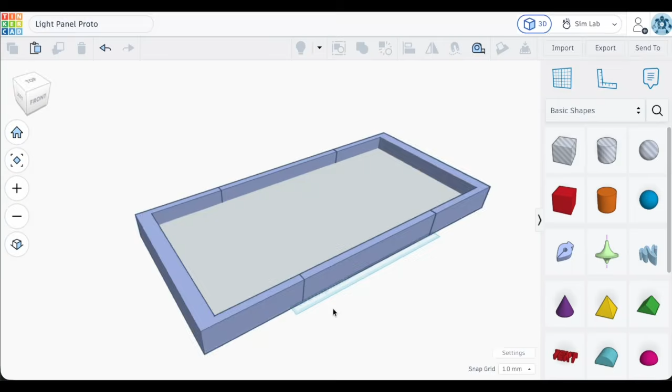So I am thinking ahead to a future project that exceeds the current dimensions of my print bed. So I'm going to need to do some assembly here. The thing is, one of the pieces that needs to be assembled is a flat panel. So I'm looking at printing this up in at least two pieces, but how will I join them together?

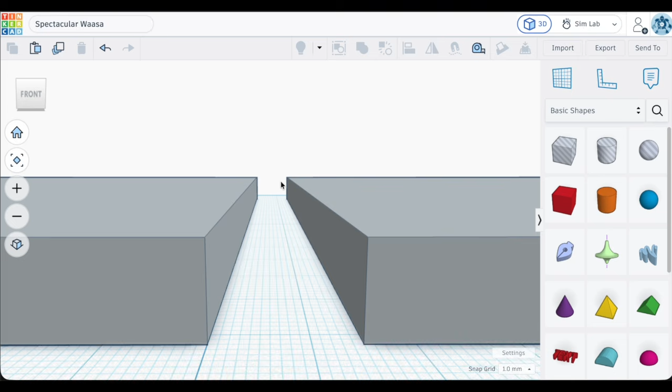So I have some options here, and that's what I want to investigate in this video. I want to figure out what is the best option to create a nice strong joint between these flat pieces of my panel. Now, slicers like Bambu Studio and Orca Slicer can add in these pegs or dowels right before

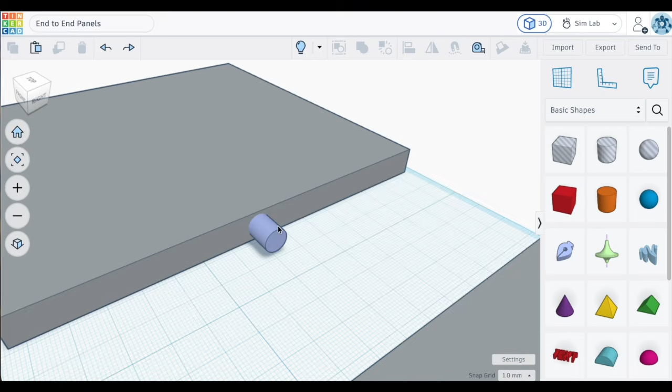you slice your project. But for me, when it comes to projects that will have several pieces to potentially assemble together, I like to take on the design of the pegs so I know how everything will fit together and hopefully catch any issues with peg or dowel placements. All right, we're going to try out some ways of joining these two pieces together.

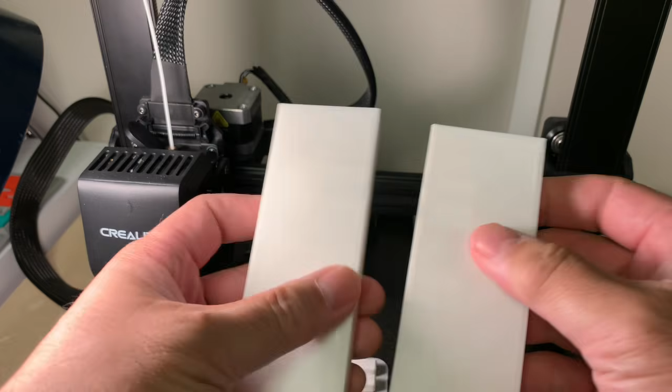So the first set of options involve the use of pegs that will fit into cutouts or holes along the side of the panels. Now, this is a fairly common way I've seen on YouTube because they help to align these different pieces up and provide additional surface area if you want to apply glue.

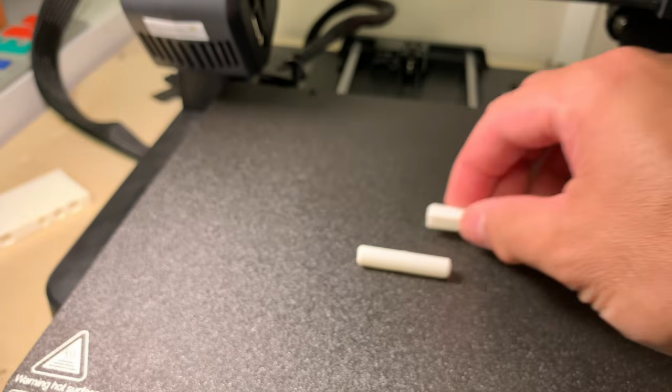Now, there are many different shapes and types of pegs that you can use. You have the cylinder-shaped peg, box-shaped pegs, and even flattened rectangular pieces, and I've seen them called splines. These can all serve as pegs.

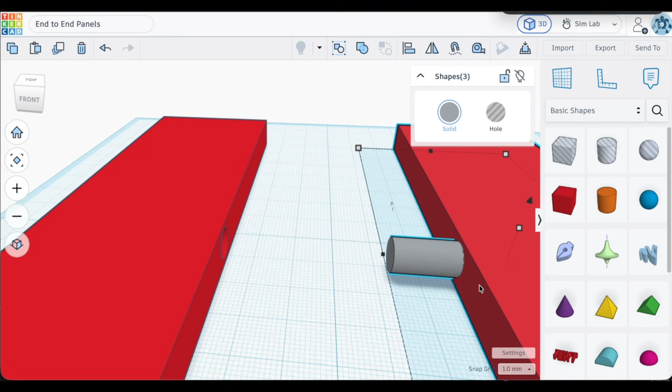Now, there are some different ways that you can implement these pegs and holes if you're trying to bring together two pieces. One piece can have the hole on one side, and the other piece can have the peg, and they will fit together. But you're going to notice that for me, I opt to print the pegs separately as separate pieces and then have the cutout for those pegs on both pieces.

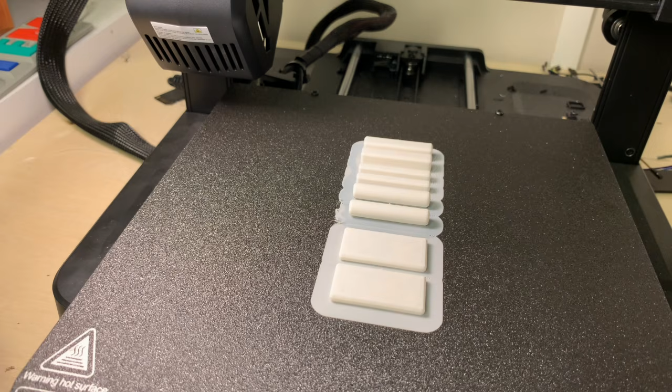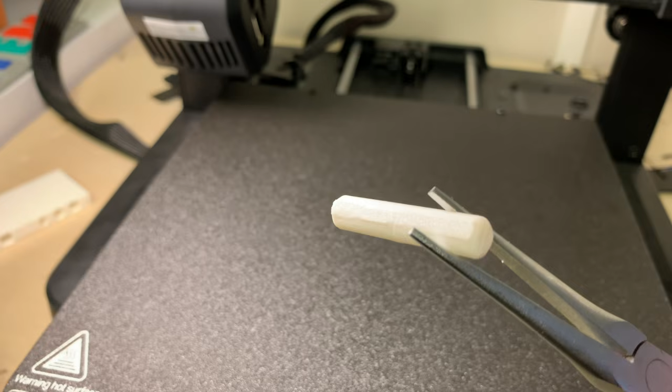I prefer to do this because it allows me to print these pegs without any need for support, as they will most likely be suspended off of the bed plate if they were attached to one of the pieces. Now, printing up a cylinder on its side does have some challenges because it does end up with a flattened side. So that is another issue that I have with using pegs that are a cylinder shape. And that's the reason why I often lean towards the rectangular or box-shaped pegs.

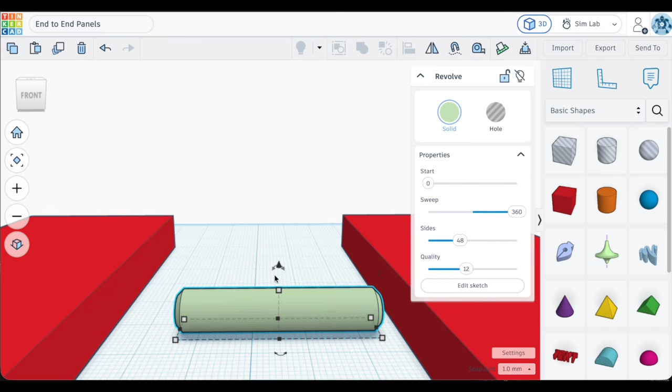Now, this brings up another important thing to consider, and it's the orientation of these objects when you print them up. For example, you could print up the cylindrical pin vertically and avoid having that flattened side that would normally rest up against the print bed. But the issue here is that the layer lines are now running across the pin rather than along the pin. And the pin is now more likely to break along these layer lines, which is what you don't want. So ultimately, I would rather print them up flat along the bed.

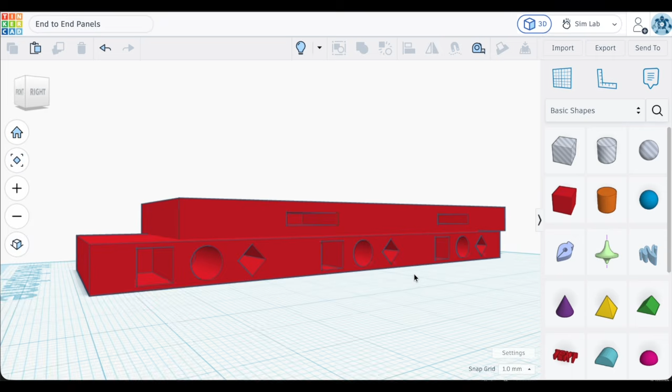Now, don't forget about the holes for these pegs. Ideally, you would want to print them up without the need for supports because it does become a little difficult when you're trying to remove them. Now, printing up these holes or cutouts without supports can be problematic because if you have a large cutout or hole to contend with, you are now asking the printer to bridge the filament across the tops of these holes,

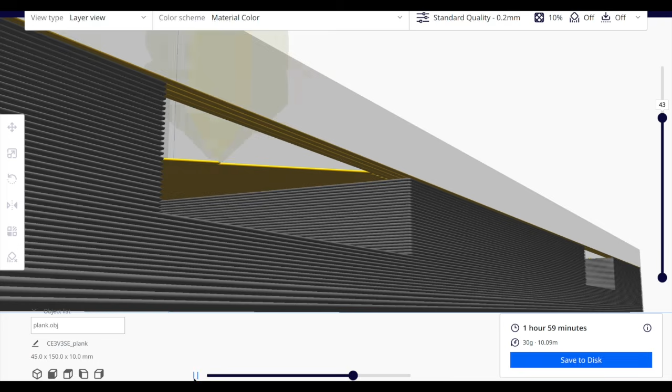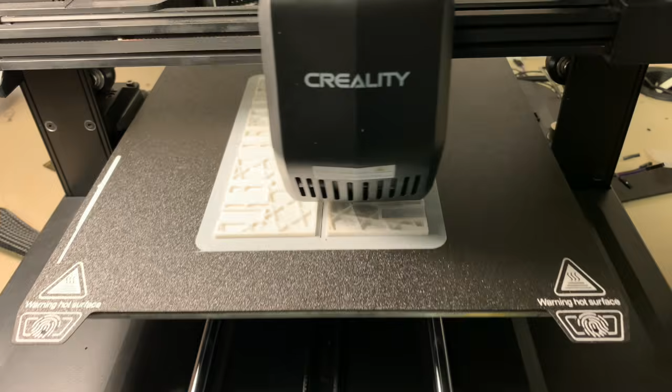and the bigger or longer the cutout, the harder it is for it to bridge without some sort of sagging of the filament, which could alter the shape and clearance of this hole, which ultimately needs to have a snug fit with the peg. So that's what I wanted to figure out here. Whether or not I go with cylindrical shaped pegs or flattened splines or square pegs, how will they print? And how well will they work in holding together two flat pieces?

All right, taking a look at the two plates or panels that I've printed up. Again, you can see how they are just 1 centimeter in thickness, and I'm wanting to connect them like this. And I've set up a series of different shaped cutouts for my pins or pegs or dowels, splines, what have you. I printed these up without any supports.

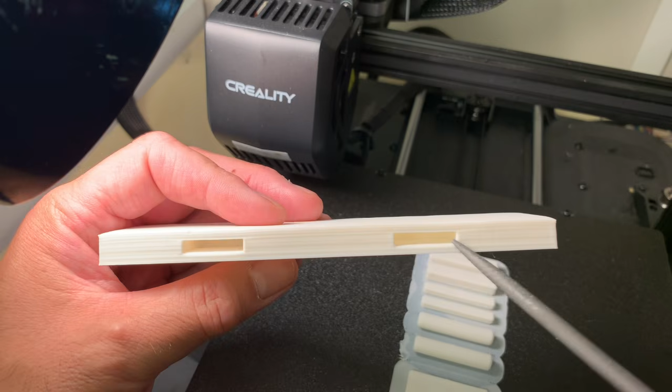I do notice that, especially when you look at this cutout here, this cutout would have to stretch that filament across. And because of that, you can kind of see how we have a little bit of filament sagging down there because there was no support there. This is a problem because obviously it's going to change the shape of this cutout, and so when it's time to put in our flat shaped dowel or spline, it's going to rub up against this and it might not even fit in anymore. It even applies to these smaller cutouts here.

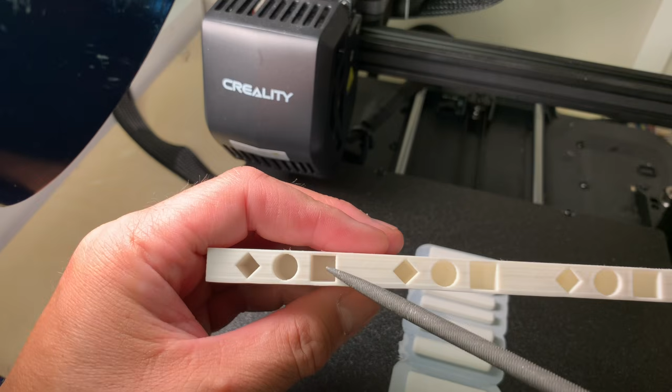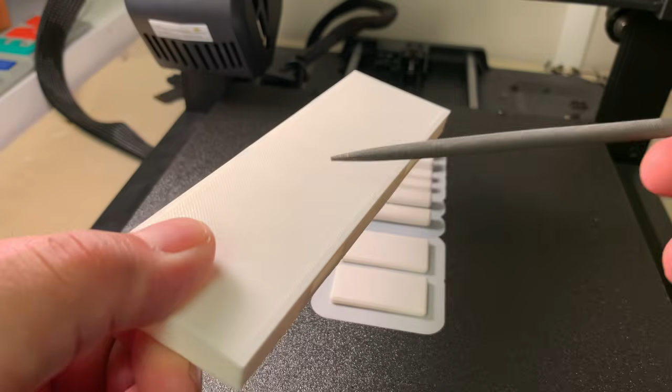It's not as much, but you can still see how there's a little bit of sag there, some filament that just sort of hangs down, even with the cylindrical shaped cutouts as well. Looking at all three of these, right now the diamond shaped is looking the best. Now I could print it straight up and down like this and I would not need any supports, but it's the direction of the filament that would become a problem because the filament layers would now run across, and if I'm using this as a plate, that might be a point of weakness where it could snap because it is going across the thinnest part of our plate.

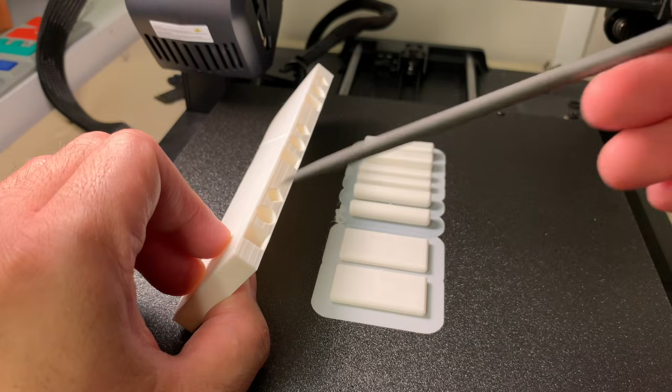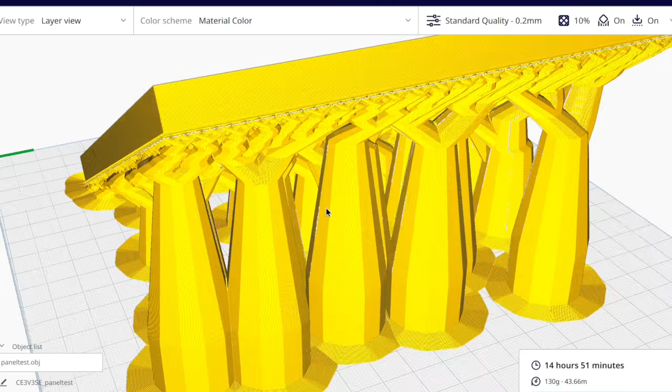I have heard about people that will print it at an angle like this where you have kind of the best of both worlds. No need for supports inside here because it is coming up at an angle as the layers are being printed, and the layer lines themselves are not going to cross the narrowest part of your print. It would be sort of coming out at an angle. I have never tried this. I'm kind of curious to see if anyone has tried this. My big concern is that this is just a small portion of this plate or panel that I'm going to be printing. I'd worry about this thing extending across the build plate, and I'd need a lot of supports for that. I don't know if that's something I want to get into.

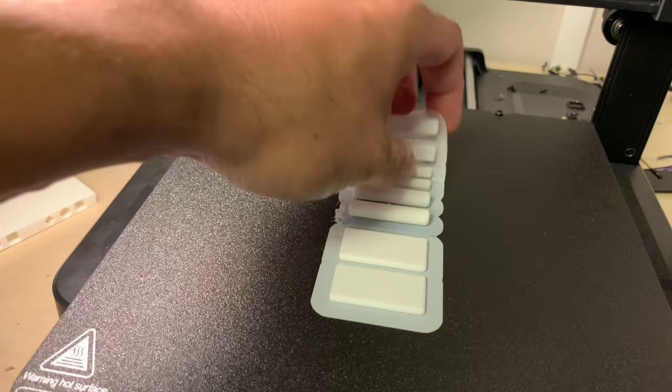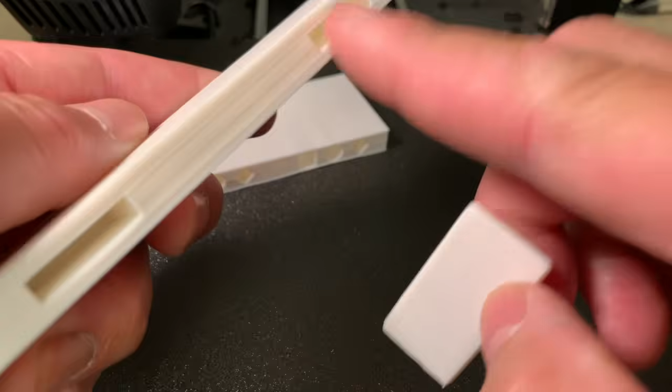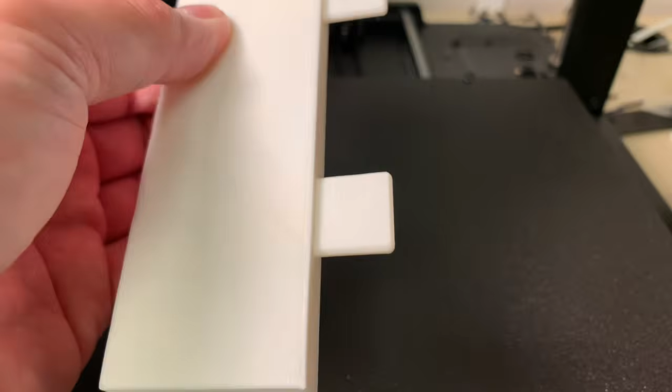So I am going to print it like that. So even though we might be dealing with a little bit of sag here, let's see how our pegs, splines, or dowels do. We'll start off with the flat looking dowels. They will sometimes be called splines is what I've seen. And I will use the cutouts on this side. That fits in nice. Snug enough that it's not going to slide out. We'll talk about how we can design these in Tinkercad in a bit, but let's just see how well these things fit together. This side seems to be really loose. That's interesting. But it does line them up nicely. I wish it just held it a little bit better than that. I would be gluing these two together, so it would hold it firmly in place. But that's the one type of dowel there.

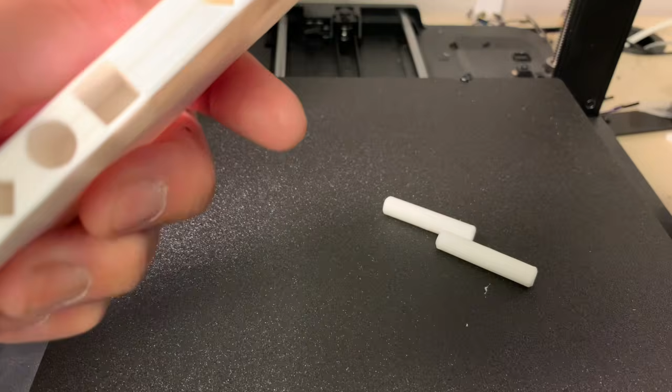Let's try out our cylinder-shaped dowels next. These ones had that flattened side, so I am worried about the fit of these. Really snug. But that's actually pretty good. I'm actually happy with that. That's definitely not going to come out. Let's see the other two. Same thing on that side. That was a little bit looser. But that's the dowels in place there. Let's put these together. Yeah, because the dowels are really snug and it fits snug on both sides, that is really being held together quite well on its own. I will glue this together in my project, but it's not bad. Do you feel like the print of this and having it flat on one side does impact the fit? It does make it a little bit more snug, but this is definitely workable.

Okay, next up, these are the box-shaped dowels, and those will fit those cutouts there. So let's put those in. Now I'm noticing that both the round and the square-shaped dowel cutouts here have been fitting pretty tight. And I wonder if it's because of the overhang there and the bridging. Maybe there were some problems there with the filament hanging down, because it really is a much tighter fit than, say, the ones down here. So I do find that there is inconsistency between the cutouts, and maybe even inconsistency between the dowels as well.

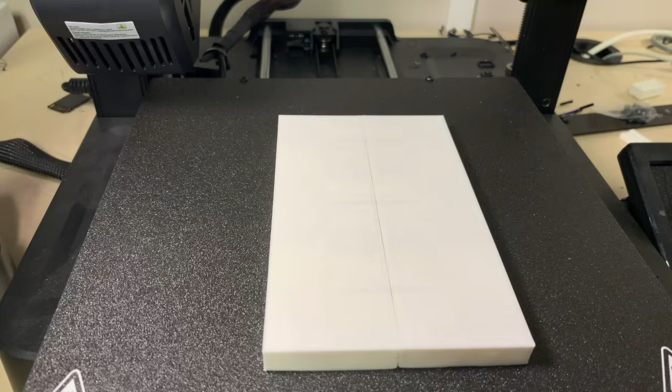But let's put them together like that. That is holding it very well. I'm happy with that as well. All right, next up are these diamond-shaped cutouts.

And the reason for this is because this cutout does not require supports because of the angles there. It's basically 45 degrees, and that's an overhang that the printer can handle without any need for supports. The pegs themselves are going to be these box-shaped pegs, but the dimensions of them are going to be smaller because of its orientation in the panel. Let's see how this does.

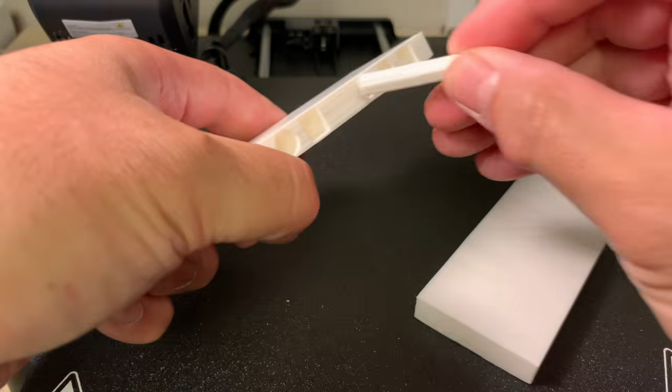Snug. That's pretty loose. This is pretty loose as well. Like that's even going to fall out. Interesting. So it does seem to be a bit of inconsistency there between the cutouts, because I can switch these dowels around, and it does seem like this series of holes in here or cutouts seem to fit tighter around those dowels. Here is the other piece.

It doesn't feel as secure as the other ones. I feel like the cylinder and the box-shaped ones did a better job, and I wonder if it's because it's just simply larger. This, I would say, did a good job as well. I wonder what it would be like if I actually had 3 instead of just 2. Of the 4, the diamond-shaped ones seem to be the least secure.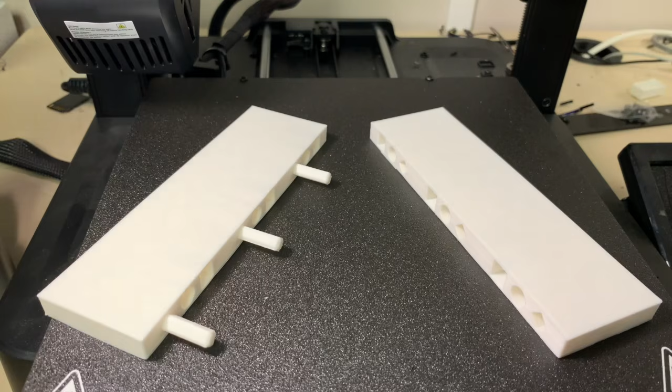And that's not just the ones that slide out, but also too, when I put them together like this, it does feel like there's a little bit more movement between those two pieces. Whereas the other ones really did have a much more solid feel. So obviously some adjustments need to be made here in order to get that perfect fit. It might require you to adjust the size of the cutouts, make them a little bit smaller, maybe make the pegs or dowels a little bit larger.

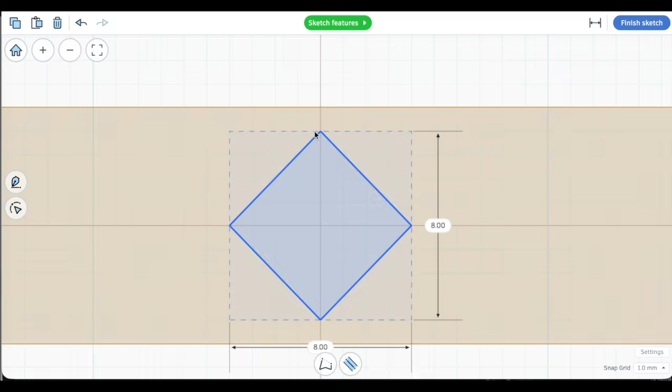So creating the cutouts for the pegs or splines or dowels, it's a pretty straightforward process. And there's many different ways that you can do this. For me, again, I tend to lean a lot on sketch. In this case, an extrude sketch, where I can quickly create a circular shaped cutout. Maybe it's a diamond shaped. Maybe it's a square-shaped cutout. And of course, you can decide for yourself how deep these cutouts should go.

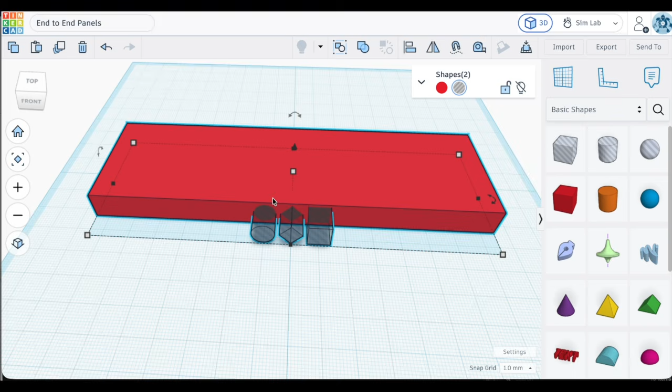For me, I went with 2 centimeters or 20 millimeters because these were going to be fairly large pieces, and I wanted to ensure that there was going to be a strong enough connection between these two plates. Whatever the case, you want to keep in mind the different dimensions of these cutouts because that's ultimately going to inform the size of your pegs. Because again, you have to allow for tolerance there, a little bit of space in order for these two pieces to fit together.

All right, let's talk about the pegs or the pins or the dowels, whatever you want to call them. You can see here that I've got them matched up to their cutouts. These cutouts were found on those pieces that we were trying to join together, and here are the pegs. Now, just a reminder, the pegs themselves are slightly smaller than the cutouts that they will fit into, again, because of tolerance.

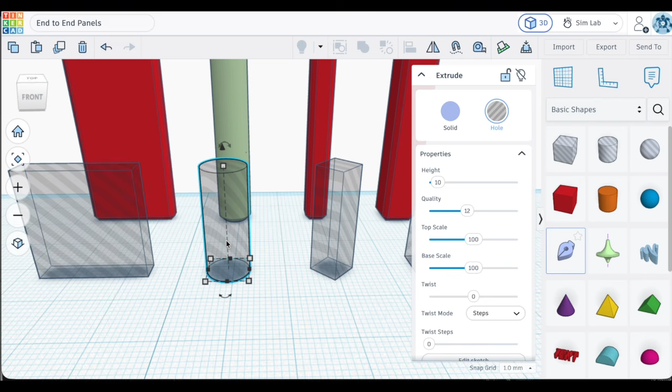And what I mean by that, if you're not familiar with this already, if I have this cutout here that has a diameter of 8 millimeters, you're going to see that the peg itself has a diameter slightly smaller than that at 7.6. My rule generally when it comes to my printer and its settings and the filaments that I'm using, I tend to pull back 0.2 millimeters off of each side.

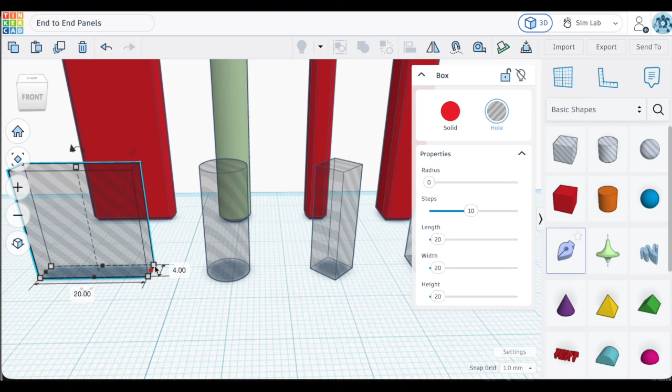So that's why when you have this cutout here and it is set to having 20 millimeters across like this and 4 millimeters back, the spline or the peg for this is 19.6 millimeters across and 3.6 millimeters back. 0.2 off of each side or each surface, and I'm left with those dimensions.

Now, does this work all the time? Not necessarily, because as you found out earlier, some of these pegs were a little bit looser than others. And so I would adjust this and maybe I wouldn't go 0.2 off of each side. I might go maybe 0.1 and see how that did, and see if that's a better fit. So again, it's a bit of trial and error here.

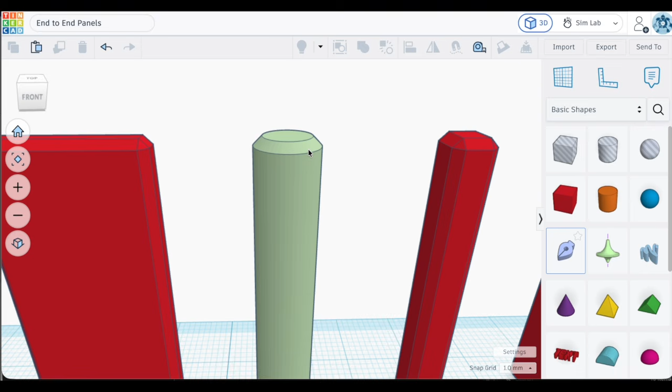Now, when it comes to actually building these things, that's where it gets a little bit interesting. You're going to notice here that for all of these pegs and dowels that I've created here, they all have that beveled edge. And that is something that I've seen on a lot of other videos, and it's a recommendation just to help with the fit as you are inserting the peg or dowel into that hole. But how you achieve that is going to be very different depending on what kind of peg you're dealing with.

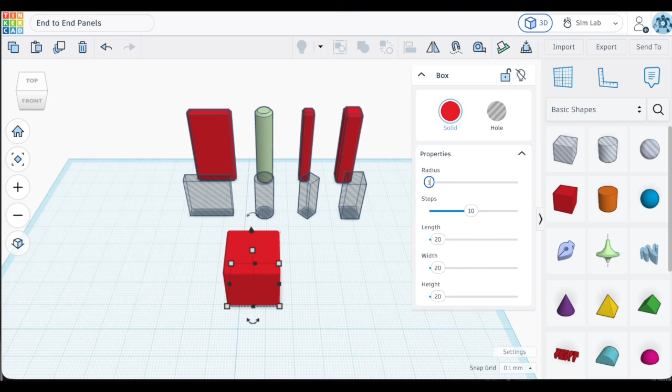For example, when it comes to these box-shaped pegs or pins, I believe the way to go for this is just go ahead and use the box shape generator. And the reason why I really like this option is because of this drop-down menu here. You have the ability to add in through the radius setting here, and for this I'm just going to enter in a value of 1. Now that gives you a fillet or rounded corner of 1 millimeter, but you can take the steps and push that all the way down to 1, and now all of a sudden you have that nice angled edge.

Not only that, it is applied to the corners as well as the sides and the top and the bottom of this shape, which is exactly what you want when you're designing your pin or peg. Make sure that when it's time to resize this peg, that you enter in the values here using the sliders or just clicking on the number and entering the specific dimensions that you want for the length, width, and height.

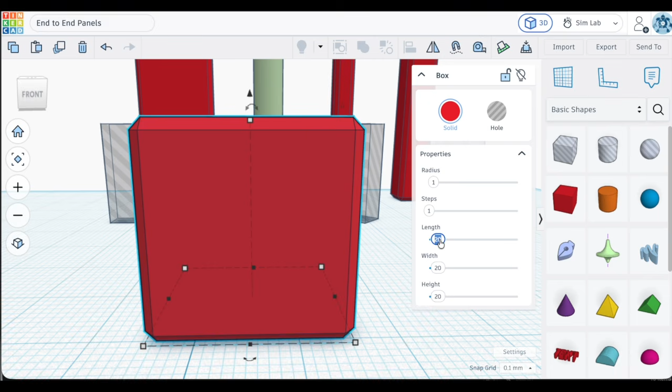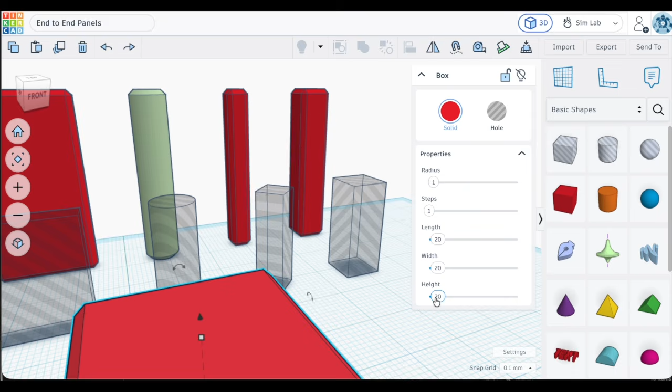This will ensure that you're preserving the look of these angled surfaces and you don't run the risk of stretching them out when you try to just use the grab points here and try to resize it by grabbing these white grab points here and then changing the dimensions. What you end up doing is stretching out that beveled edge. Entering in the value down here will help prevent that from happening. That looks a lot better.

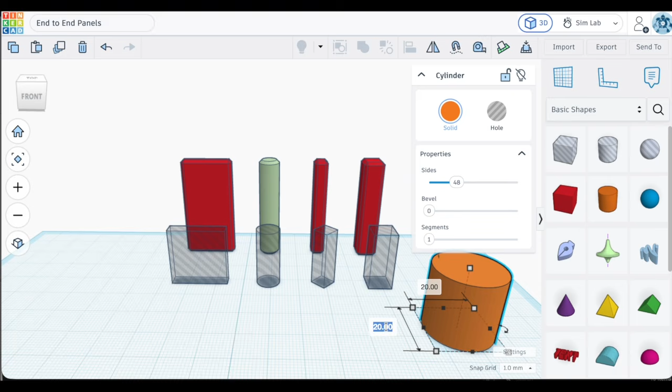However, when it comes to designing the cylinder-shaped pegs, I don't go with the cylinder shape generator. I actually go with Revolve Sketch. And the reason why is because when you open up the cylinder shape generator, there's no way for us to adjust the dimensions of this cylinder using the drop-down menu on the right. And so as a result of that, if you're going to adjust the proportions or dimensions of this cylinder, you run the risk of stretching out those beveled edges.

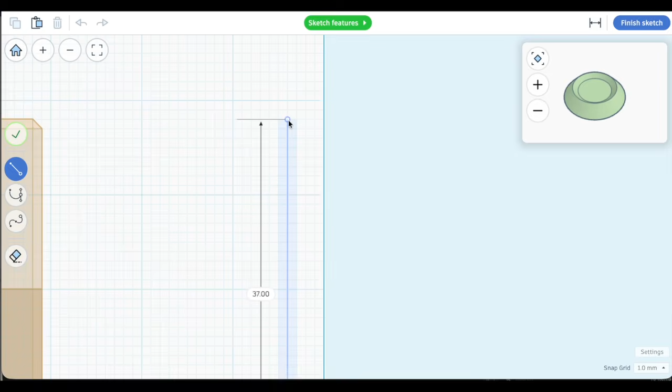So that's why I go with a revolved sketch, because I can sketch in those beveled edges and literally just draw out my cylinder using the appropriate dimensions that I want for this particular peg. Now, don't forget, when you're using revolved sketch, you need to be aware of this center line here, because whatever is drawn to the left of that line will be revolved around this center line, and that will complete your overall shape. So in this case, I'm just drawing the 1/2 of my cylinder pin here.

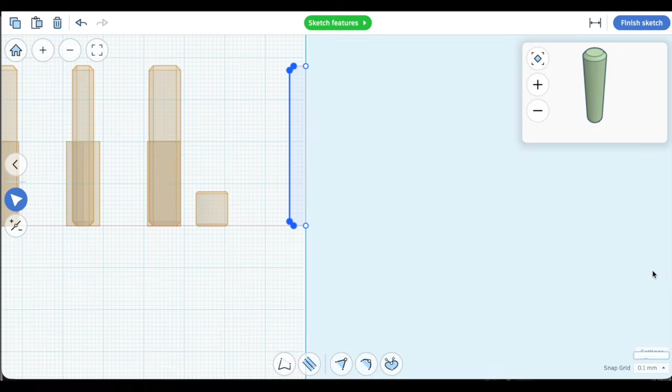And again, if you need to make adjustments to your pin, for example, for me, I needed to adjust the tolerance here so that this pin had an overall diameter of 7.6 millimeters. I could select the points that I wanted, change my snap grid settings to 0.1, and then using my arrow keys, bump it back to the appropriate radius to give me the overall diameter of 7.6 millimeters.

So for some of the folks that are very familiar with Tinkercad, there's probably not a lot of new concepts here, but I wanted to get this video out there because this is something I'm currently exploring for a project. And for those that are not familiar with dowels or trying to create these cutouts and pegs and pins, I'm hoping that this was helpful to you.

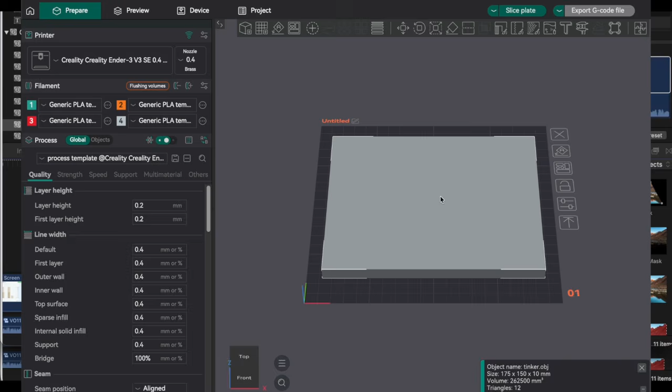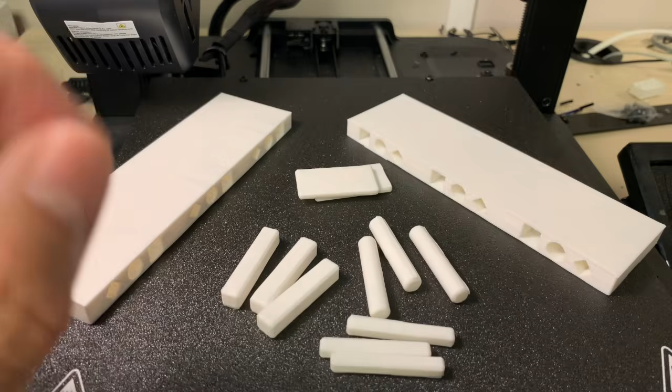Now, if you're familiar with Bambu Studio or Orca Slicer, it is possible to actually generate your own dowels in the slicer process. However, there is a reason why I'm going through this, and it's because I want to try to create some way of locking together pieces using a dowel type of system, but having it lock in like a snap pin. So that's what I'm going to get to work on next.